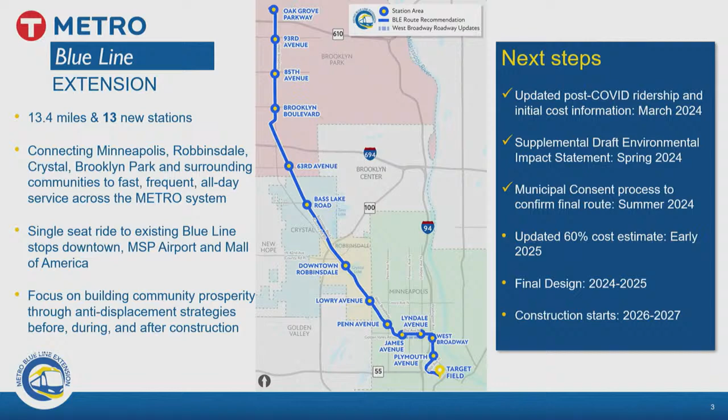In October, we did receive unanimous official support for the project's design and station locations from all of the cities and Hennepin County as required by state law. So that step was completed that allowed us to move towards what we call 60% design, which we anticipate to be completed in the spring. Then we would move into final design. Currently anticipating some construction could start to occur in late 2026.

The overall phase of the schedule that we're working on with a lot of assumptions about progress being made over the next couple of years is we're just finishing that design phase. The record of decision, the important milestone, as soon as we receive the record of decision, which is a decision of FTA, that allows us to then begin the right-of-way process as one major milestone. As you can imagine, on a 13-mile corridor in an urban environment, there's a tremendous amount of property and right-of-way that drives a lot of the schedule, and we need to get started on acquisition of those rights in order to meet this construction schedule.

The other major milestone this summer, which is key for our local funding partner, is requesting a rating on the project from FTA to see if it scores for federal funds in the CIG program. That's a program that is possibly undergoing some change with the change in administration. As part of that request for a rating on the project this summer, the local funding partner must make their financial commitment to the local share of the project. So this is an important year in 2025 where we try to get a signal from FTA about what part of the project will be federally eligible and what will need to be funded by Hennepin County as the local provider of the capital funds.

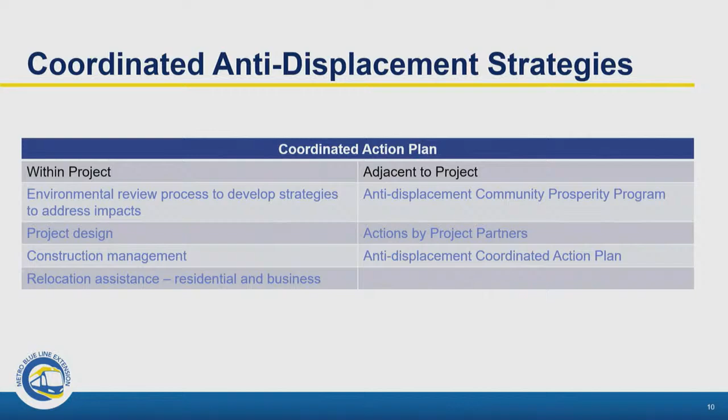And then there's a full report on what our partners can do for anti-displacement along with the project, including a lot that the Met Council will be doing through grants we already have in place and through coordination, support, and delivery of this project.

So I want to highlight one design element that's before the community today, right now, and it's in the news. It's also one of the remaining elements impacting the environmental process, but also an outcome of the municipal consent process.

And that is the Lowry Avenue station near North Memorial Hospital. We've talked about this before, but it's a station that is physically in Robbinsdale, Minneapolis, within the Minneapolis Parkway, and right next to North Memorial Hospital. In the resolutions of support for municipal consent, Robbinsdale and Minneapolis asked us to continue to look at the design options on that.

They approved the design that we submitted, but asked that we consider some of the concerns that the park board had for connection to the parkway and the hospital had for connections to the hospital. So from that, we developed options A through I in design and started to work with each of those partners.

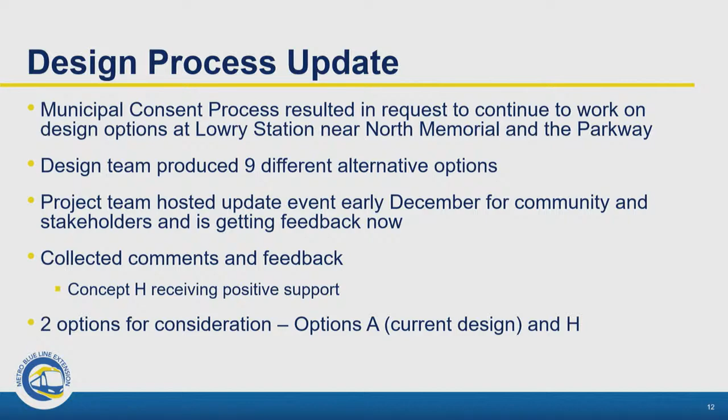I've started to roll those out to the public for input over the last couple weeks. I'm just going to show you briefly option A tonight and option H. Option A is the currently approved design, and option H is what we feel is a strong other candidate that meets each of the concerns the park board and the hospital expressed. These are the two leading design options we're taking out to the public that could be built with this project.

I'll have to describe it, it's a complicated area. The North Memorial Hospital is to the left side of the picture there. The complicated part about this interchange is it runs diagonal to the parkway. Lowry Avenue connects in here and also to the hospital. As you'll see in future presentations, Lowry Avenue is an important potential ABRT route for us, so this will be, if selected as a future ABRT route, an important connection for ABRT and Blue Line Extension.

The park board's concern was that the proposed design would cross the parkway, and asked us if there'd be a design where we could separate the rail from the parkway so there wouldn't need to be an at-grade crossing for the trails. Though this design itself is right in the middle of those two bridges that are there, that's County Road 81. For context, those bridges are about 2 years old, so very recent. We're trying to find a design that fits within the investment that has just recently been made.

But it's a very complicated area. It's a unique area historically. That used to be a giant roundabout back in the 20s and 30s. That was the highway out of town back in this time, so a lot of traffic went through there. And then it's Theodore Wirth Parkway and Victory Memorial Parkway coming together at that location.

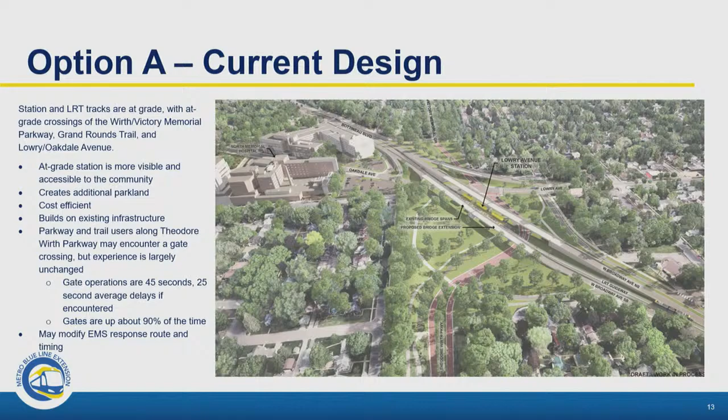In the next design I'll show you, the red road there is the parkway, and we've essentially taken the elevation and lowered the parkway below the railroad tracks to create a third level, and then raised Lowry Avenue to be an interchange with County Road 81. So more bridges in this design. The unfortunate part is it would require us to replace those brand new bridges that were built for County Road 81. It does meet, it's a really good transit design.

I think it would satisfy the concerns of the parkway, but it would be significantly more cost to construct because of the replacement of those bridges. From a design perspective, we believe this is a good design in the very long term. So it's a decision that will be before the project decision board and the local funders about what option needs to go forward here. We do need to settle on one of the designs.

The decision has been made to put a station at this location, so we're just trying to finalize which of the designs. This is important because if we change to this new second design, it will impact schedule in addition to cost. That's a decision coming up over the next couple months. There'll be more input — we'll be presenting to the park board to get their official input, and the Corridor Management Committee will see these options next week. The public is being asked to weigh in on not just these two options, but all 9 of the options we're presenting. So lots of choices.

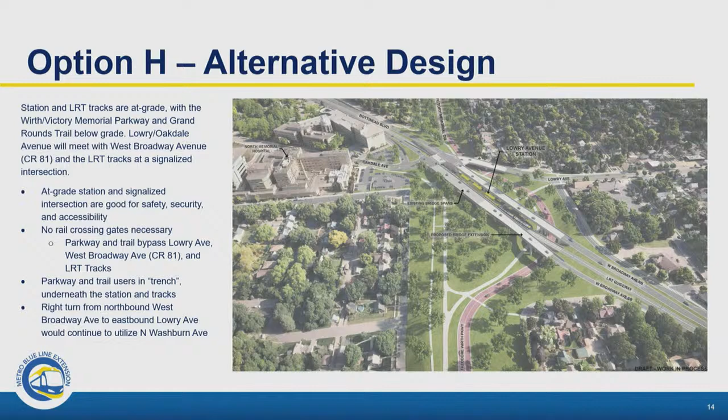And then lastly, I'll just close with the look-ahead schedule for 2025. I've mentioned a few of the key milestones. Environmental is the most important.

Local funding, local resolution from Hennepin County supporting their financial commitment to the local funding will be important. Hennepin County does need to get an understanding from FTA about what the federal share will be. This is the year they need that signal. That's going to be a challenge.

The design will advance past 60% design, so a lot of work will occur. No construction in 2025, but we will be getting our procurement documents ready, meeting with industry all year long, getting the subcontractors and workforce ready for building this as soon as possible, with procurement on schedule for 2026. So a lot of work done this year, and a lot to come ahead, but that's where we're at in relation to the 2 business items tonight.

I'll take any questions?

So I'm curious, the A and then H, is that a result of last night's workshop that you got H as a more attractive, popular, conceivable option?

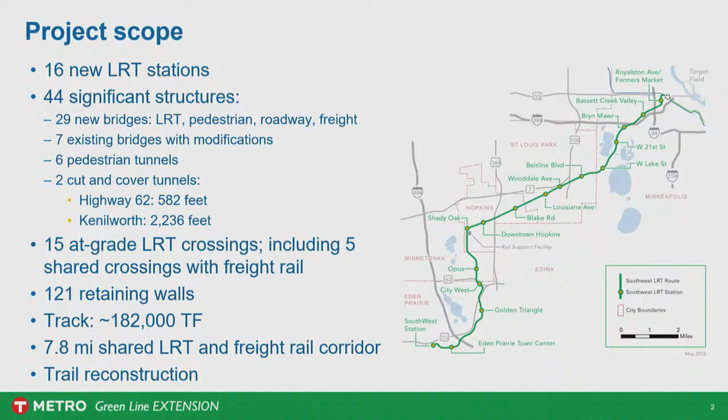We're really getting to the final stages on this project, believe it or not. But before I get into that, I wanted to talk about development.

We just got some new numbers from Michael Kranz at Metro Transit, and things are continuing to look upward. I think we previously reported about $2.8 billion of permitted or built development along the corridor. Now we're looking at a little over $3 billion. This is numbers from 2011 through 2023 that have been tracked, and that report should be coming out fairly soon.

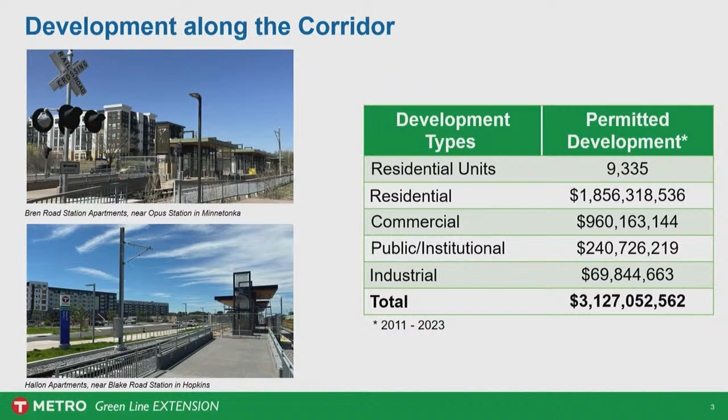But things continue to blossom out there at a number of the stations. Overall, the project is roughly about 85% done now, and we'll talk about the tunnel in a little bit, but we are making good progress. We had a lot of good work done this year.

You recall there are two primary contractors working on this project. Lunda McCrossan is the civil contractor. They are responsible for the track, stations, roadway work, tunnels, bridges, those type of things. And then the systems work is led by Aldridge Parsons. So those are the two primary contracts we have in this endeavor.

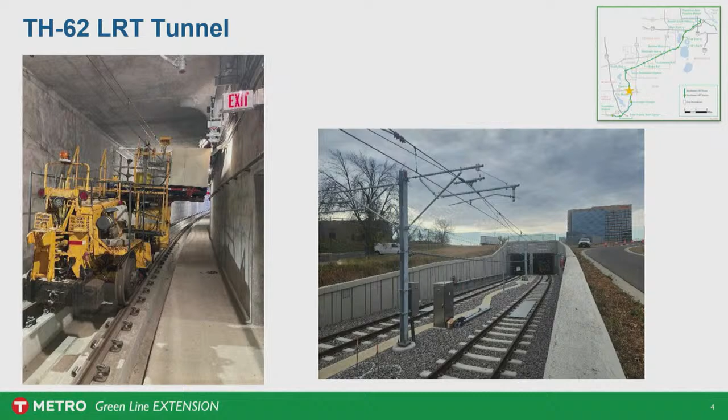This is the systems contractor working on the 62 tunnel that is more or less complete. There's still some finishing items on the systems end. And as we progress from essentially west to east, civil work is really done for the most part all the way up to about Beltline, Minneapolis remaining.

I have some photos to show you the status of that. But this is more systems work in the Shady Oak station area near the border between Minnetonka and Hopkins. This image on the right is a pocket track that we have for operations to stage vehicles, accommodating up to 6 vehicles as needed. And there's provisions to build a second pocket track if that need comes in the future as operations progresses.

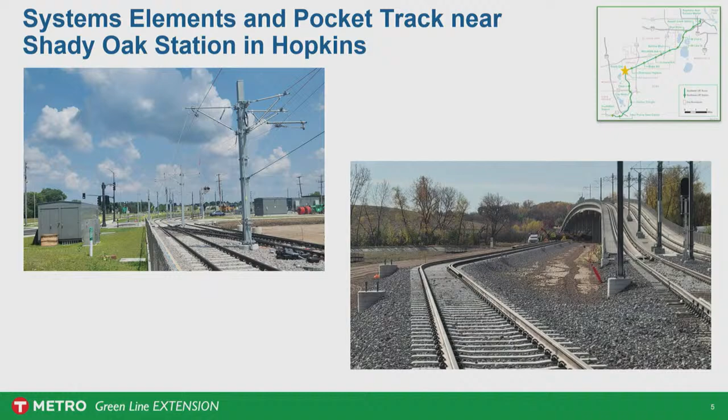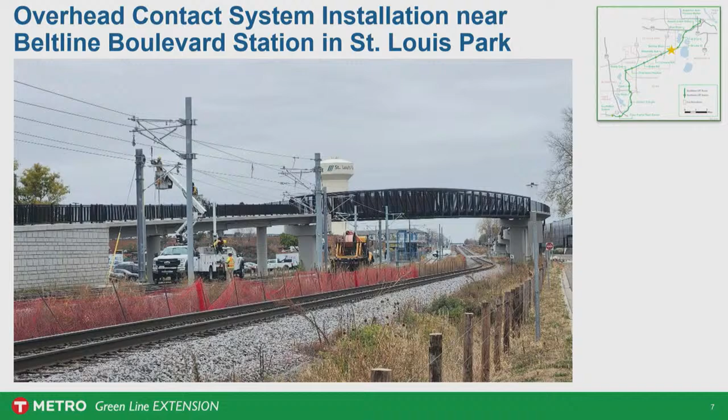As we progress into St. Louis Park, what you see in the distance is a pedestrian bridge for that trail system, and the systems contractor is putting up the overhead contact wires. We essentially have wiring up all the way from Southwest Station through Beltline now, so that's progressing very nicely. And then the tunnel, my favorite topic here.

We are about 95% done on the structure itself. So things are progressing. We're actually starting to string rail through the east part. These are images from the west part of the project, and you can see the Cedar Isles condominium in the distance on that left image where we're placing the roof slab there. But things are working well.

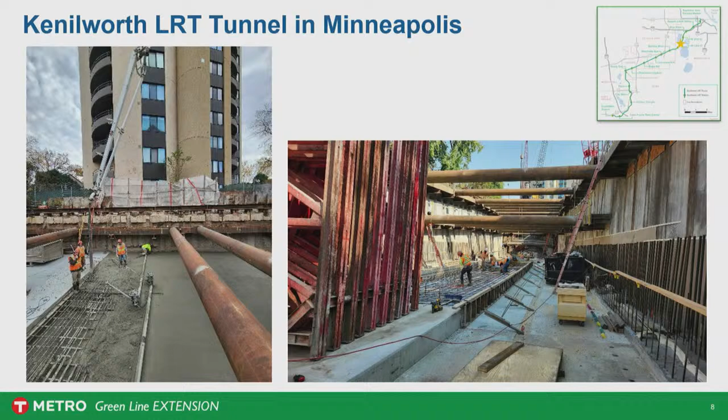The contractor continues to work on this segment. Most of the other work is kind of shut down with the cold weather, but they're actually doing form work today and being out there in the chilly, willy weather doing the concrete. So that's going to progress. We look to have this tunnel structure done in the first quarter of next year. So that's progressing very well.

I think I've shown images like this before. This is the inside of the tunnel, where, as I indicated, we're starting to string rail through here. This is just one of the tubes in the tunnel on the east end.

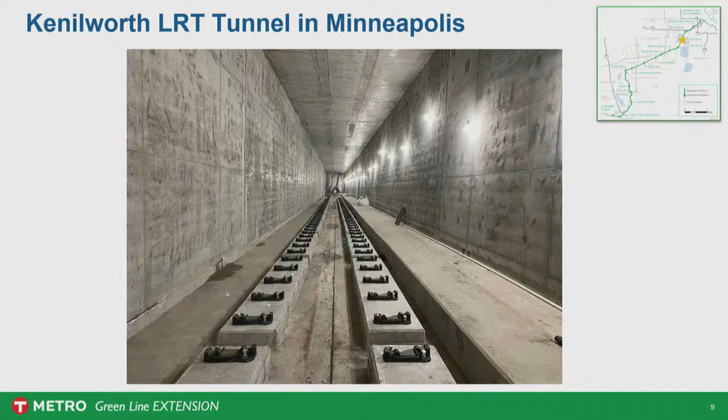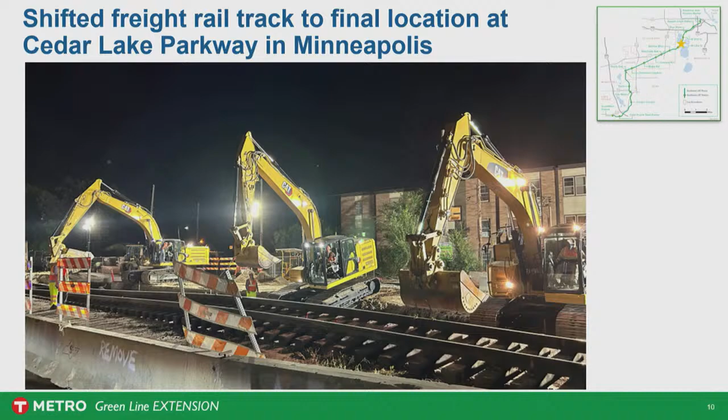Earlier this fall, we did some night work where we had to put the freight rail in its final location at Cedar Lake Parkway. That was quite a big endeavor. We had a bit of disturbance and work overnight to do that because we have to work around the railroad's schedule in terms of getting this work done. So we had to work like a 24-hour operation to get that done.

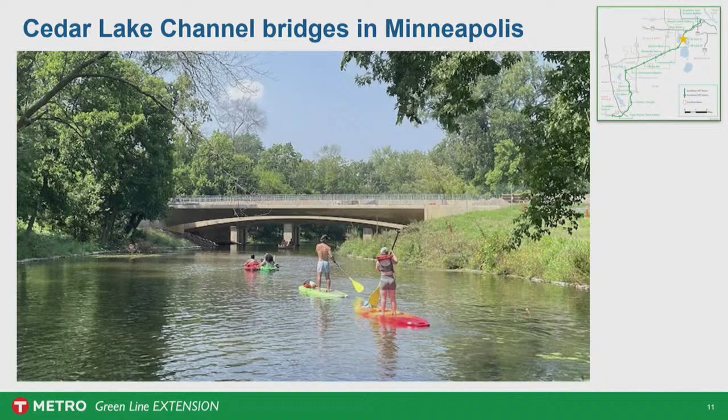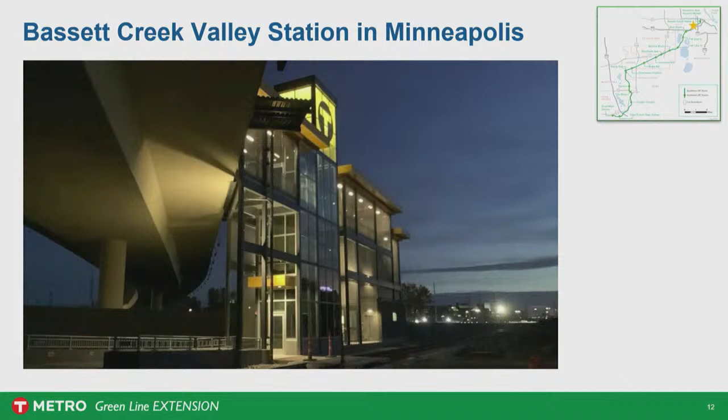We did some light testing about a month ago at Bassett Creek Valley Station, and this is that image there. We've also made the connection to the main line near Target Field. So that work essentially has rail now installed all the way from the main line in Minneapolis near Target Field out to about Bryn Mawr Station, and of course we have rail completed, as I reported before, from Southwest Station to Beltline.

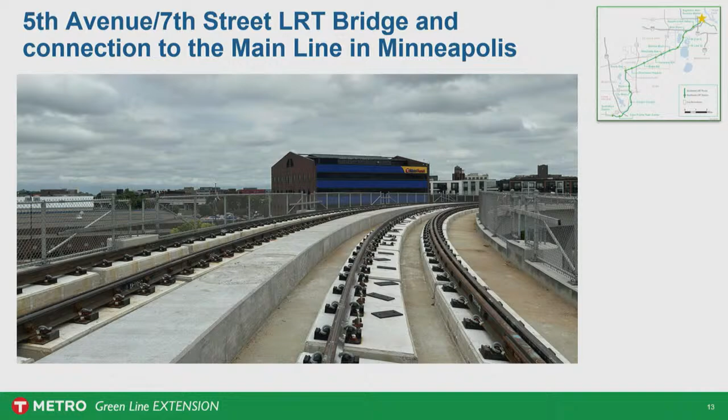So we still have the segment between Beltline and Bryn Mawr. It is our goal to get rail all the way installed so we can pull train cars through the tunnel and out west so we can start testing in the third quarter of 25.

And that's going to be done in three phases. The first phase from Beltline to Southwest. The second phase would be from the main line down to about Bryn Mawr, and the last phase would be from A to Z, the whole alignment. That's all programmed to start occurring in 25 into 26.

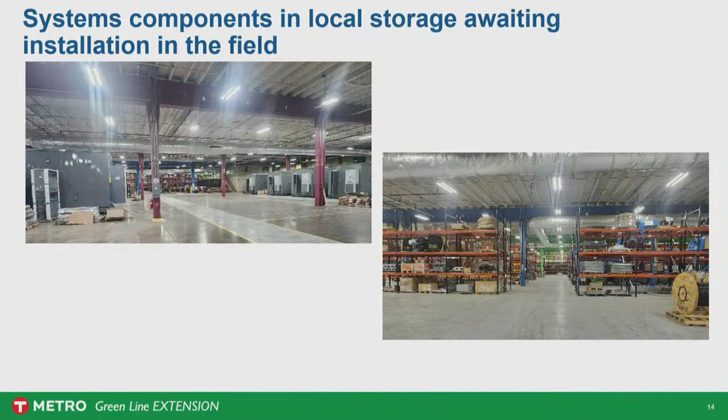This image reminds folks of the change order we did a couple of years ago, where we had the systems contractor build out the equipment, manufacturing, traction power substations, signal houses, and all that, storing it locally so we'd have it ready to go. We did this because of the delay we've talked about in the past to both contracts, civil and systems, and this allowed us to continue with manufacturing and avoid the supply-demand issues during the COVID and post-COVID era. So that storage facility has been a big savior for us, from my perspective.

So I will hand it off to...